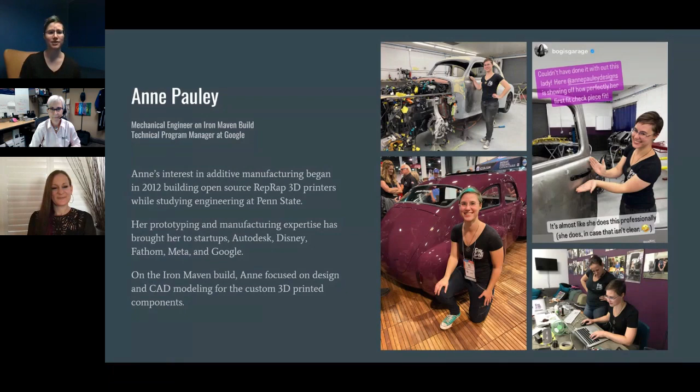Girl Gang Garage is an amazing organization founded by Bogi. She had been working in the automotive industry for a long time, so she came in with that technical expertise as well as business expertise, and translated that into helping other women in the industry, as well as women interested in the industry, to connect with each other and learn. Girl Gang Garage now hosts more than 200 women a year in various project builds, as well as creating lots of professional development opportunities, including learning about 3D printing and CAD modeling.

So the Iron Maven build, which is what we're talking about today, is a really slightly insane build. This car is a 1961 Volvo PV544. This body was taken from right outside of Phoenix, which is where Girl Gang Garage is located. And the body of the car is even a little bit old style for 1961.

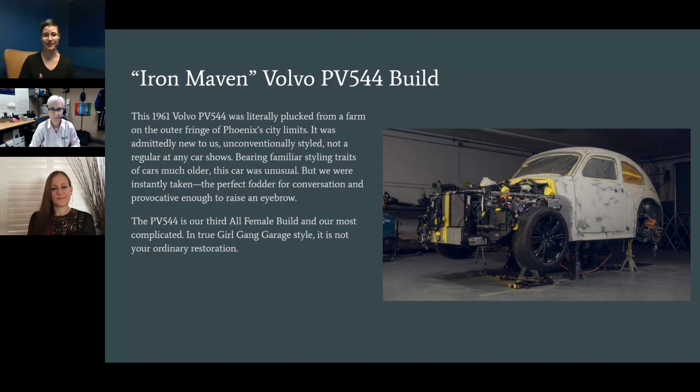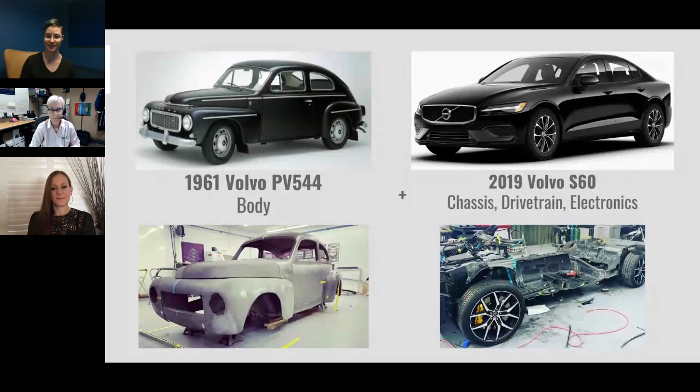So basically think about squeezing a new Volvo sedan into a classic Volkswagen Beetle and you'll get the idea.

So how did we get involved and how did 3D printing come into play? Bogi wanted to incorporate 3D printing and was connected with Stratasys to support the 3D printing side of the project. So Stratasys came on as a sponsor, which is how Pam got on board, as well as Girl Gang Garage getting a printer to use on site for prototyping and production parts. Once Pam was on board, she reached out to her Women in 3D Printing network, and that's how I got on board for the project.

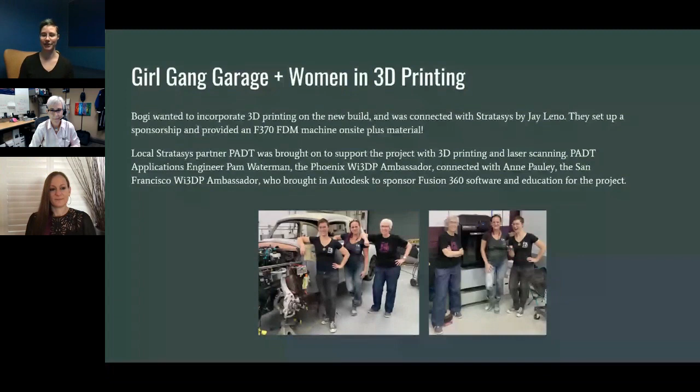And once I was on board, I knew we needed a CAD software. I knew we needed support for not only actually doing this build, but creating those educational opportunities. So we brought on Autodesk to support CAD and education for the CAD and design software.

Just to give a high-level view of what the timeline was, this was an almost 2-year-long build. This project started at the beginning of 2021. We brought on Stratasys very early on. Women in 3D printing became involved very early on.

And then in 2021, we were very focused on the 3D scanning part of the project, doing lots of scans, figuring out the workflows for taking that data, coming up with designs off of it, and figuring out what types of parts we really wanted to focus on for this vehicle.

Once the teardown started and we had a better idea of what kind of parts we really needed, we ended up focusing more on parts that replicate production parts. We didn't want the 3D printed parts to stick out like a sore thumb on the vehicle. We wanted to use 3D printing to make parts that perfectly match the style of the vehicle, parts we never would have been able to get off the shelf for this custom build.

And so in the middle of 2022, I had the awesome opportunity to work on site at Girl Gang Garage for about a week and a half total. We just worked all day, every day, iterating quickly, running the 3D printer, making parts, testing them, making a new part all day, every day.

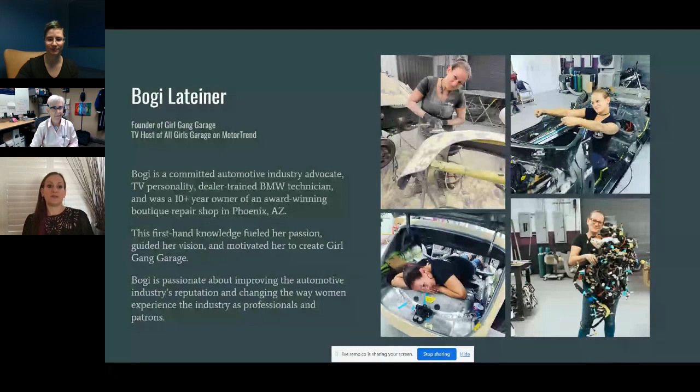But I had no experience with CAD, and I had no experience with 3D printing. So this was really my first foray into it, and the same with so many of the women involved in the build. So again, kind of keeping that idea of pushing ourselves, learning new things, celebrating really old technology, but also celebrating really new technology—celebrating old cars, celebrating new cars, mashing all of it together.

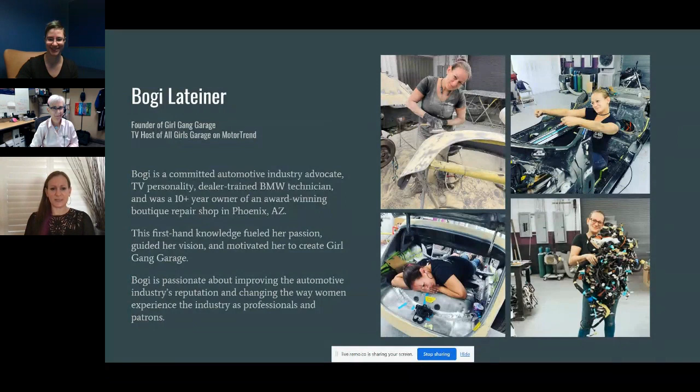And it was just such an incredible experience. A little dangerous, I have to say. Learning CAD design is a little dangerous because I've always gotten myself into trouble with this idea that I can make or do anything if I put my mind to it. And now adding 3D printing to the mix, it's like, oh wow, now I'm really going to get myself in trouble with, 'oh it's easy, we'll just make it'—5 weeks later.

But there is change happening, right? When I first started in the industry, women made up 1.8% of all automotive technicians. And that number is rising, and in part, I believe, due to visibility.

So we've done 3 all-female builds now. SEMA Business Women's Network has done a couple of all-female builds. There's some other small groups around the country that have done little projects. But I think really creating that connection between women within the industry reinforces their stick-to-itiveness when it comes to staying in the industry.

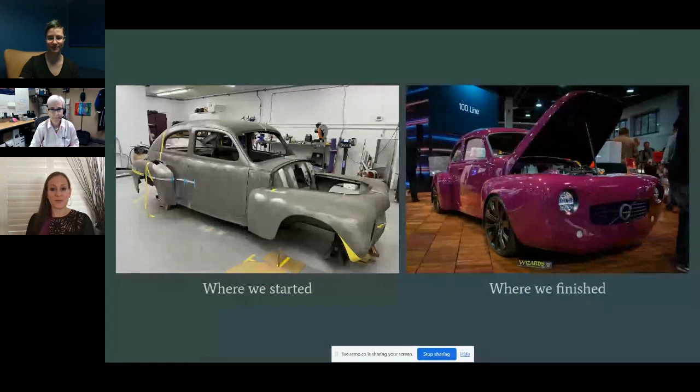I hope to see more and more women entering this industry, more integration of 3D printing. I think technology is incredibly exciting and creates so many opportunities for women to get involved in an industry that is still so incredibly male dominated. So it's exciting to me to see more and more 3D printing being incorporated into car builds and automotive work.

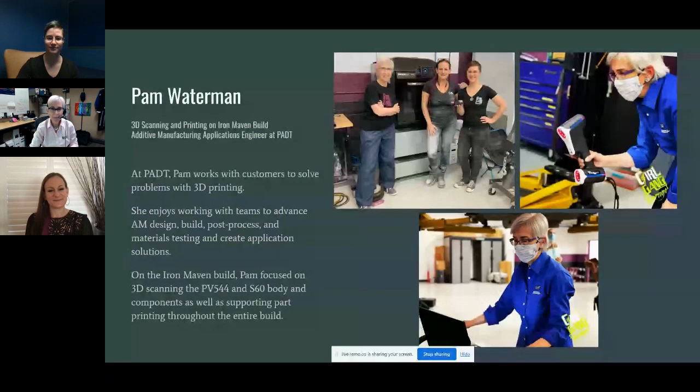So what it required is we needed to capture what we call a digital twin. We wanted to acquire data for this one-of-a-kind vehicle project because, as Bogey said, we needed to have information to allow us to make changes. None of the things we were going to do were just off the shelf, you could order it. The starting point for making decisions on what the new parts would look like would be to have data that we could bring into a CAD program and then edit and manipulate.

So the 3D scanner that I use, it's handheld. It's based on two kinds of laser transmissions, different wavelengths that give you different kinds of information, but it creates millions of points in space—literally just giving you an XYZ coordinate point. It creates what we call the point cloud that captures the shape on the outside of the body of the car, on the inside of the body of the car. We also scanned the new car coming in. We've zeroed in on small components—you can do fine details like the door handle or the overall shape. We were able to merge that data and convert it into what's called the standard STL mesh file format.

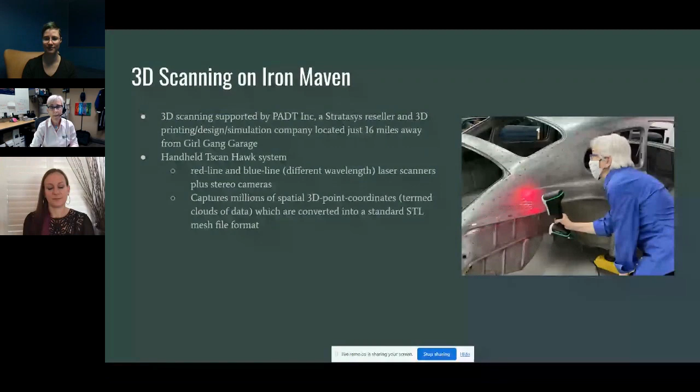But I knew that after acquiring the data, creating this digital twin, there was a workflow that had a few extra steps before you could just hit the button on the printer. And that's where it was astoundingly wonderful that Anne was able to come in with her CAD knowledge and translate information—whether it was data that I had interrogated just to get measurements and dimensions, like the distance between two hole centers where we had to mount something, or whether it was the actual STL mesh file that we were able to convert to a surface. Then Anne would change it into an actual solid model that could be edited, because that's the key—we knew we were going to make changes, we didn't just want to capture what was there. So there were a lot of steps involved.

As Anne said, throughout the process we had to scale down a little and figure out which elements we were going to focus on and work with. So, next slide.

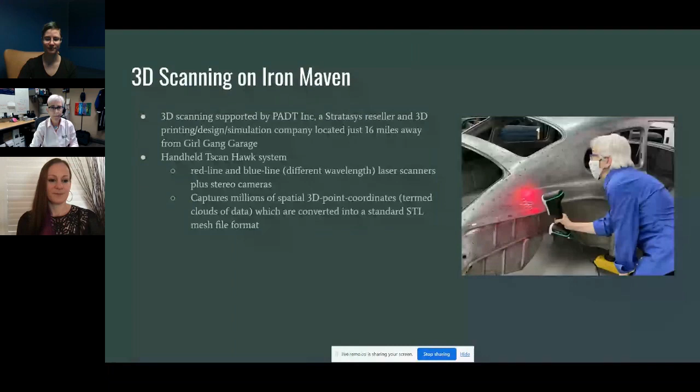This gives an example showing when I did the underside of the body. The scanner is made by Zeiss GOM. As I said, it's a laser system.

First we had to capture reference points. It took several hours with several of us using little sticky reflector dots, but those are very critical. You establish a reference system, a frame of reference for all of the different angles. That's what allows you to move the scanner by hand while going all around this system. Then we were able to interrogate the data, pull measurements, and take subsets for moving on to the next steps.

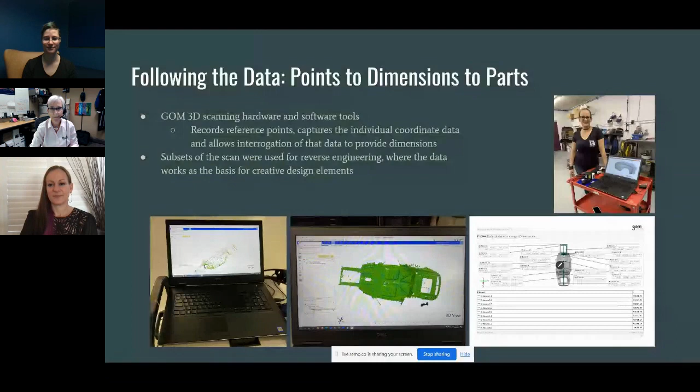Having gotten that data, with Anne's help and several other people, we had an amazing CAD Tiger team. We were able to do some experiments first, just printing a few elements as we found them.

So there's Bogie and Shonda working with the F370 printer. It's a filament type printer, right there in the garage, with the car behind us. In that case, we did a prototype of just one of the mechanisms of the handle, to start with, and then used that to visually compare the hole spacing and the decorative handle cover that went over it, back and forth, making creative design judgments and decisions, going through that whole iterative process.

So the FDM printer worked great for both prototypes and some of the final parts that Anne will be talking about. I also had access to another Stratasys printer that uses a different additive manufacturing technology called DLP. It uses a liquid resin rather than a filament, and it's cured with a UV light. That produces parts with a little bit finer finish.

So there you're going to see a part—I did one in black. It prints upside down, and this is a sacrificial support material. Here's my nice smooth antenna cover. Again, you'll see more of that.

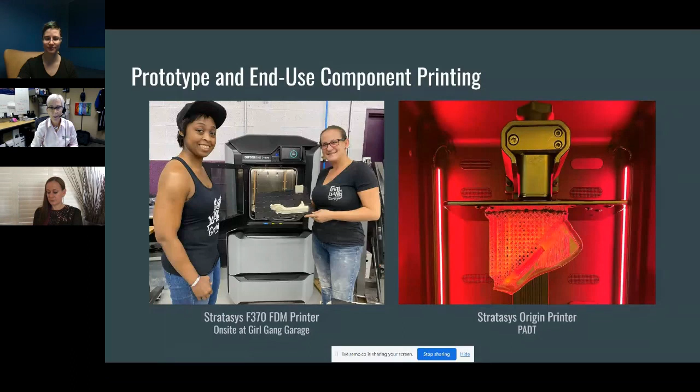Okay, next slide. Awesome, and thank you so much, I think Anne—yes, that's Anne. Up to you now.

I'm going to talk through the highlights of the parts that we worked on here. Our goal was to replicate parts that for some vehicles you might be able to buy off the shelf. But for this build, because it was so unique, all of these parts had to be custom.

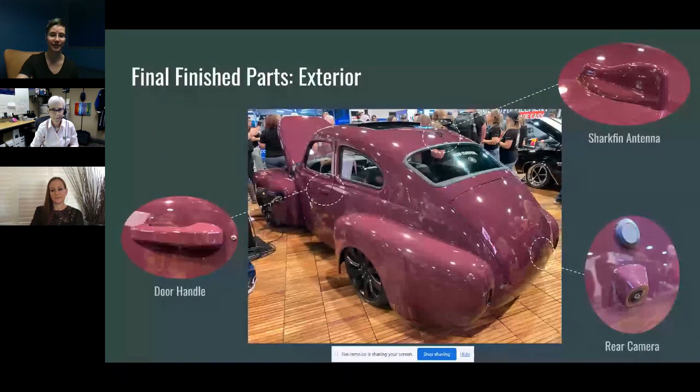For the exterior, we had the door handle, the antenna, and all of the camera mounting and casing. For the interior, we actually built an entirely custom cabin air duct, as well as a suspension adapter, which is maybe my favorite part, even though in a lot of ways it's a little bit hidden, because this is the part that Bogey made after taking her first CAD workshop.

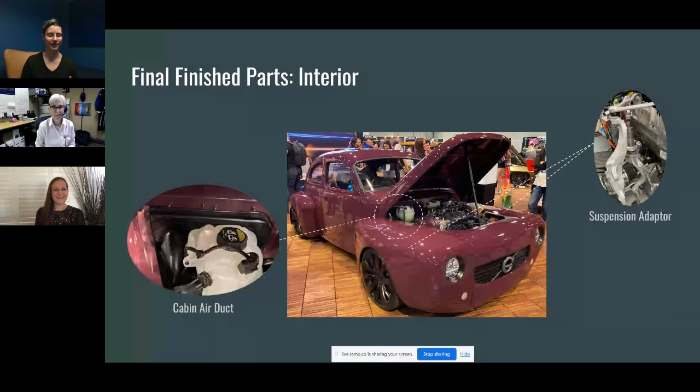So for the door handles, we created this custom component that not only fit this car style-wise, but also fit this modern mechanism and integrated the lighting and proximity sensor. The PV544 didn't have this modern door mechanism, so we combined the S60 door mechanism with that body. The S60 mechanism was much, much bigger scale-wise than what made sense for the PV544, so we took that mechanism and took a lot of that material off.

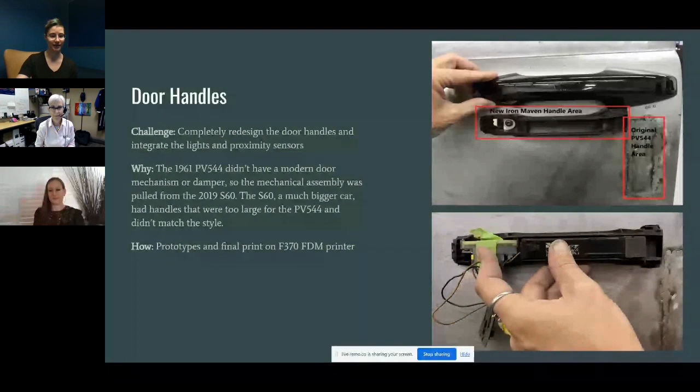To create this part, Pam 3D scanned that modified mechanism, and there were some really critical snap points that had to be perfect for this handle to snap onto the vehicle—not too tight, not too loose—and also fit all of those components into it. Using this 3D scan, we were able to grab those mounting points out of the CAD and, with only a couple fit checks, get that perfect snap-on fit. Then came iteration—we went through several rounds to get this handle as small as we could.

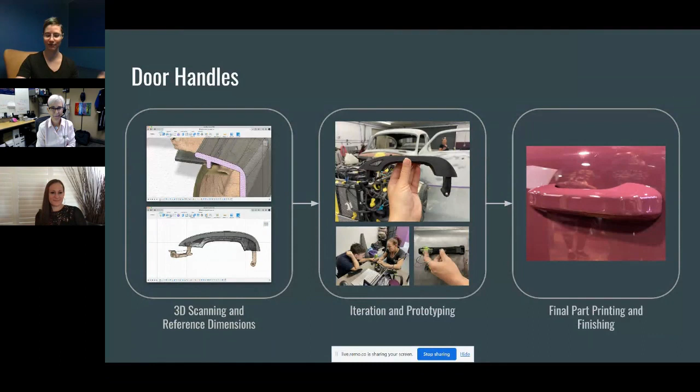We're actually still iterating on it, so there might be a new door handle on it the next time you see it. I just got used to every time we printed a part, Bogi would say something along the lines of, okay, this is great, but can we make it smaller? This was an extremely iterative process, and then the final part was printed on that Stratasys FDM printer and then finished to look like a fully off the press production part.

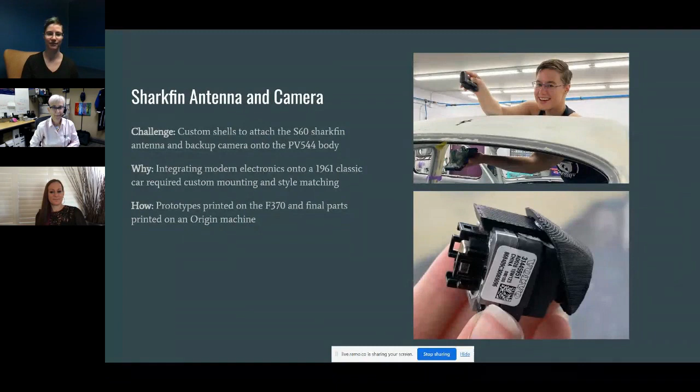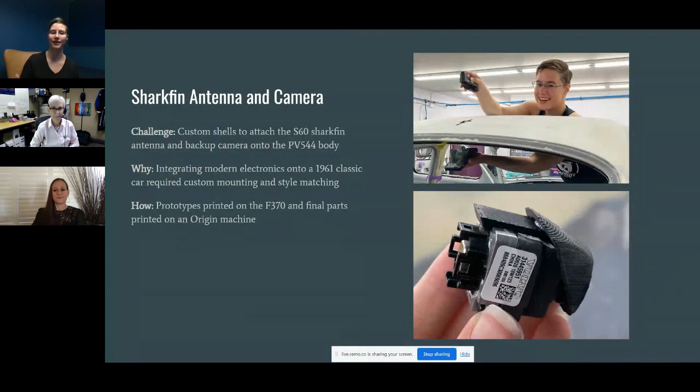The second and third parts are this shark fin antenna and the camera cover. These are also very aesthetic parts that had to be custom, both to fit the style and to fit the body, and both integrate these modern electronics. We had to fit the outer body of the vehicle, but also do lots of fit checks in order to get the part as tight on this component as we possibly could.

So taking all these 3D scans of the antenna module, which is the electronics module that has all the antenna components, this CAD screenshot is actually a layered view showing the 3D scan and a stepped back side view of the vehicle. Combining these two things, we were able to use that 3D scan to make the interior geometry of the antenna cover, and then use images to track the outer surface of the vehicle. You can't see it in that picture, but there's somebody hunched inside the trunk of the vehicle holding this up against the roof. And then just like the door handle, lots and lots of iteration, lots and lots of Bogi asking me if we can make it just a little bit smaller. The final printed parts were printed on an Origin resin printer and the FDM printer.

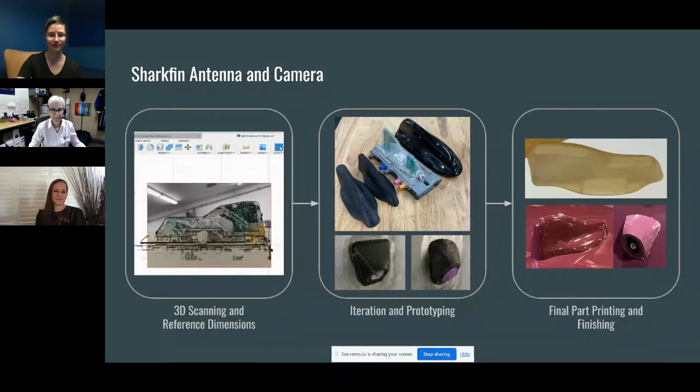The final ones that I wanted to show you are more functional parts rather than aesthetic. So the cabin air ducting, the module that was coming off of the S60 for the air duct, was way too big to fit in the space on the 544. You can see that coolant tank sitting there. The original module probably filled almost all the space that coolant tank is sitting in. We had to not only create this custom component that had a completely different envelope, but we also rerouted the air intake to a completely different part of the vehicle. It originally pulled in air from the top of the hood, but the 544 just does not have an air intake in that location. So this fully custom component solved multiple problems for us.

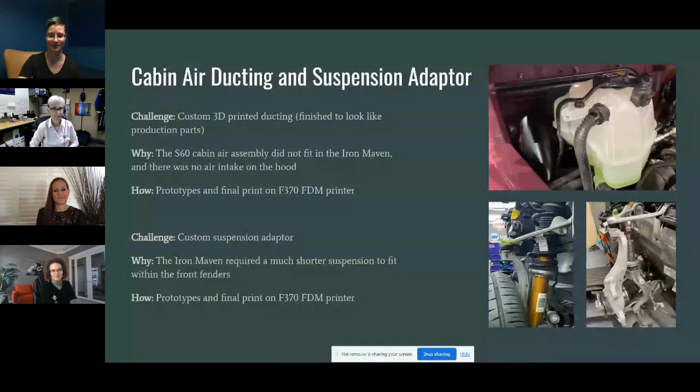And then this custom suspension adapter, it's the same thing. The 544 was so much smaller than the S60 that it needed a completely different suspension that was much shorter. That completely different suspension required some way to bridge the gap and create an adapter between those two threaded parts, and this adapter just does not exist. It had to be a custom part. On this one, instead of 3D scanning, we used reference dimensions that were pulled off of the vehicle as well as pulled off of imaging to come up with a rough model of what was happening in that engine, and then iterating it and printing the final parts. Both of these parts were printed in ABS ASA on the Stratasys F370 printer.

I don't know about you, but if I looked at that, I would never guess it's a 3D printed part. They did such a good job finishing these parts. That's what happens when you have professional automotive technicians finishing a part. It looks so much better than I could have ever made it look.

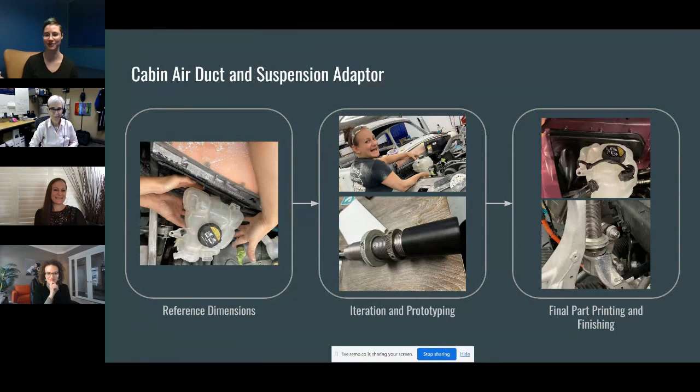So I want to bring Bogi back to talk a little bit about what's happened since SEMA and just what's next for Girl Gang Garage.

Yeah, so we are taking a pause on doing large scale builds like the one that we just completed. It is amazing and exhilarating, but exhausting and takes everything out of me, so we're taking a pause on that. The focus this year is really going to be on educational opportunities, hopefully more opportunities with Autodesk and with Stratasys doing some more learning in that arena, but also bringing groups of women to various places where we can get specialized education, doing some smaller scale projects, but really focusing on education and on community, and less on the intensity of a massive deadline like SEMA. So the connection, the community, the learning will continue. Hopefully we will actually get to sleep this time though. That is the plan for Girl Gang in the future.

And we are all available for some questions and answers if anybody has any for us.

Yes, there are some really good questions, but first, thank you so much to the three of you. I think you probably haven't seen the chat so much in the last 30 minutes, but people are really excited. So thank you. I think we were all excited to hear more about a project we may have heard of here and there on LinkedIn, but getting a chance to really hear from all of you on the Iron Maven project, it's amazing. So thank you. And yes, Bogi, I can only imagine how much energy goes into a project like this. So kudos to all of you for making it happen.